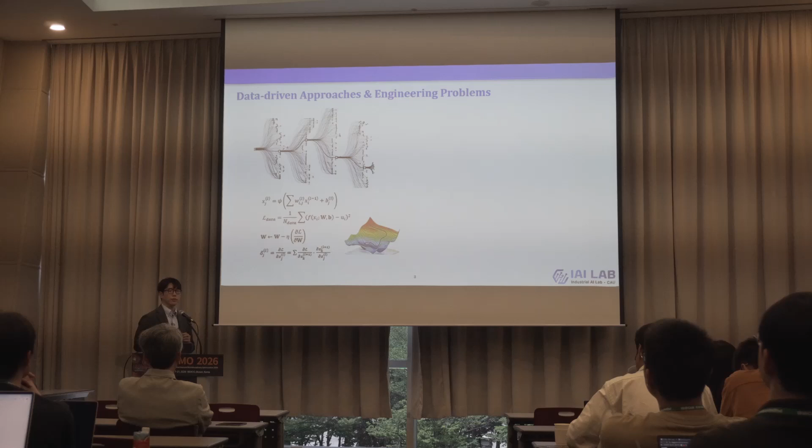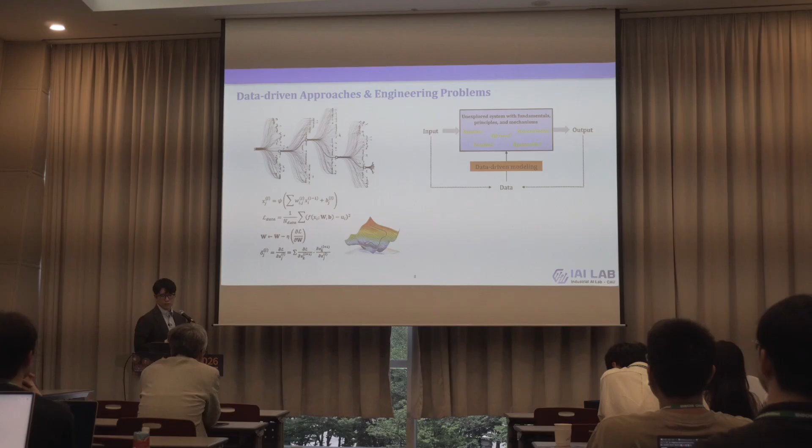All right. First, as you know, data-driven frameworks are trained on a bunch of data sets, and they might need to see thousands or millions of observations to make good predictions, right? So this raises a need to develop appropriate methods when specifically dealing with engineering systems with lots of physics and principles, from perspectives like generalizability, explainability and feasibility.

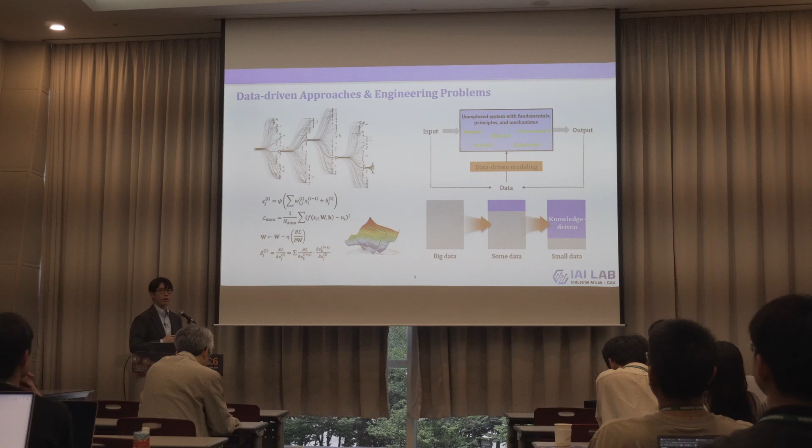So by integrating our domain knowledge with AI, we can move forward to knowledge-driven AI, not just for pattern recognition, but with improved capabilities for understanding underlying phenomena. Under this motivation, ever since my PhD study, I've defined a new field of study called engineered AI or domain-driven AI, which integrates our domain knowledge into data-driven frameworks.

More systematically, they can be integrated in 3 different ways. First is learning bias, which takes advantage of governing relations of the systems in training neural networks. We can also leverage architecture bias in designing new deep neural network architectures inspired by engineering principles. And representation bias underscores the importance of domain-specific data representation for effective information.

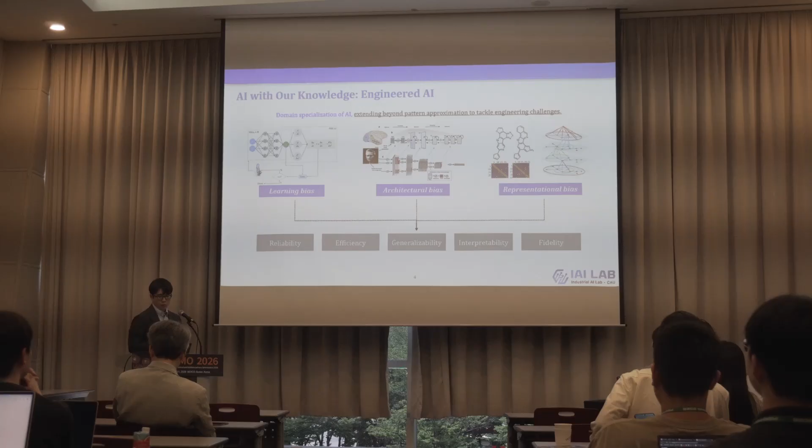So taken together, we can realize domain specialization of AI for tackling our engineering challenges, which means AI for engineering and at the same time, engineering for AI. There are many pillars to the engineering workflow, but let me take just a simple example.

Let's say I want to run my own bakery, and that makes me consider several things like conceptualization, right? Like how should I make bread and how many? And actually I should make some recipes and products, right? And I should do some baking and tasting to finalize the process.

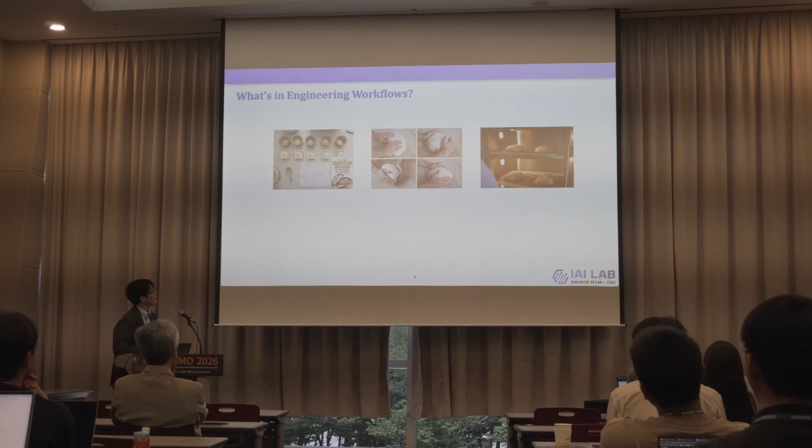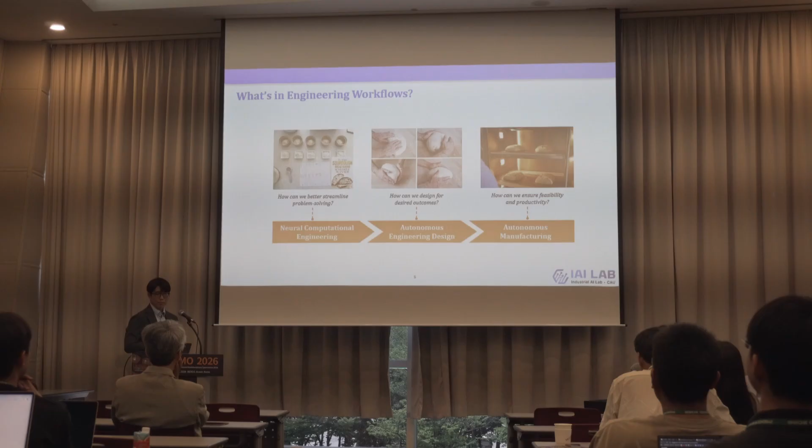In engineering sense, these several stages pose research questions like this. And our answers to the questions are associated with neural computation methods, autonomous engineering design, and autonomous manufacturing. Due to the time constraint, today's presentation will cover some of our works underlying the neural computational methods.

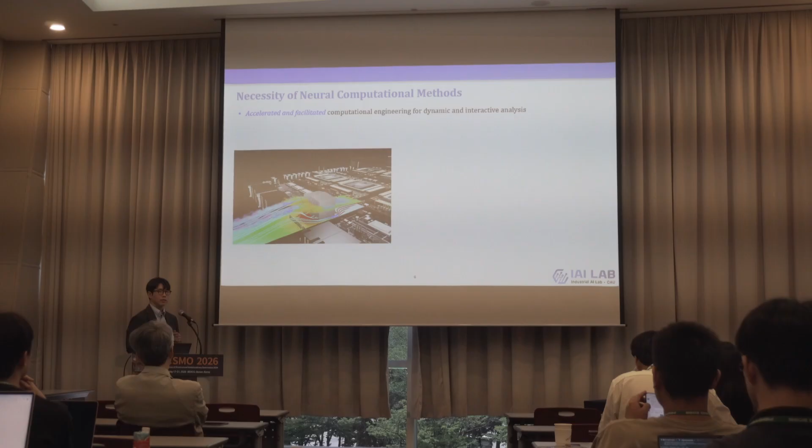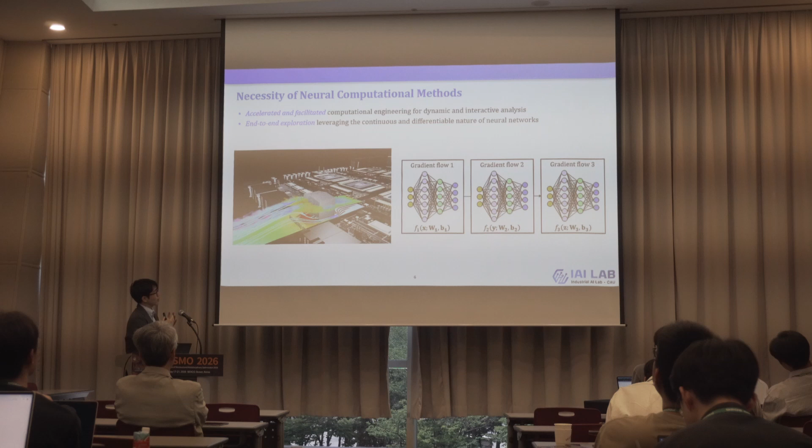Okay, so one of the main motivations of neural computation methods is to provide new opportunities in engineering analysis, because we are often constrained by excessive cost and tedious processes in engineering analysis. It raises questions of how we obtain a real-time and well-performing AI model. And the continuous nature of gradient-based neural networks can be utilized in an end-to-end manner for the entire problem-solving pipeline.

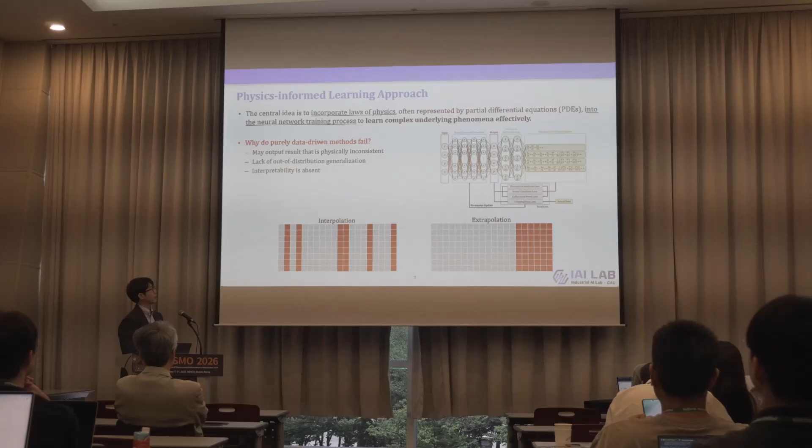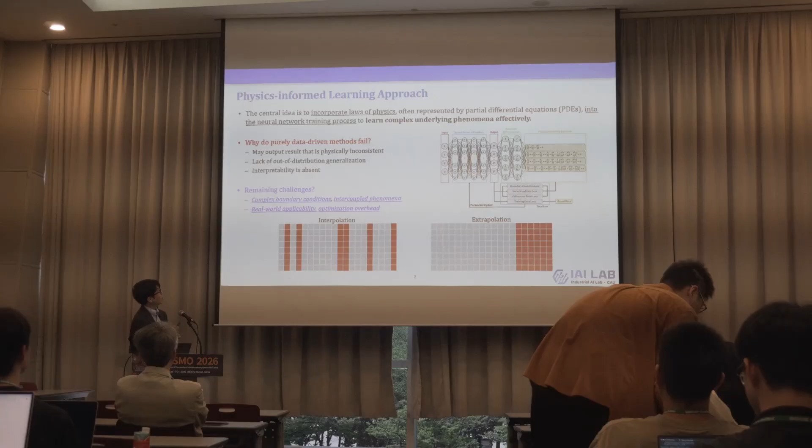Under this umbrella, physics-informed machine learning has been explored in various scientific and engineering applications. It has been designed to incorporate the governing equations of the systems, overcoming several limitations of purely data-driven methods. It can be very beneficial in many cases, but challenges remain, such as the lack of capabilities in complex boundary conditions and intercoupled phenomena, real-world applicability outside the simulation, as well as its optimization overhead. So I'm going to show you several directions for these.

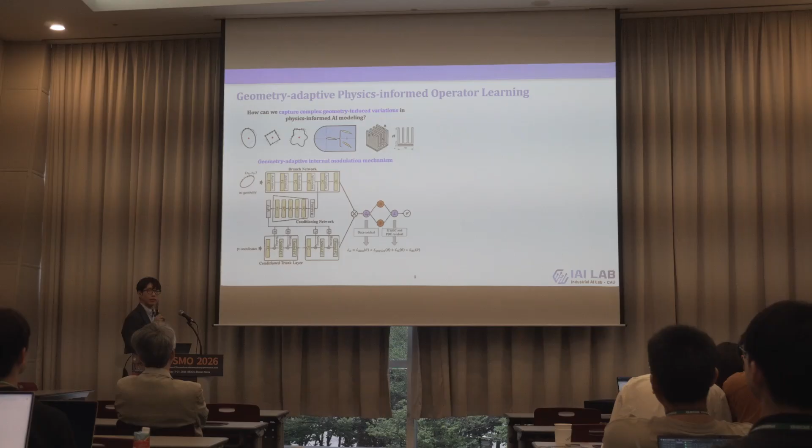One representative study falling into physics-informed machine learning is to learn complex geometry-induced variations, with expandability even in 3D space. We newly designed a geometry adaptive internal layer modulation mechanism to effectively capture feature information within the physics-informed learning scheme. As you can see, our proposed method can achieve robust and superior predictive performance compared to other physics-informed learning approaches. So we have more results.

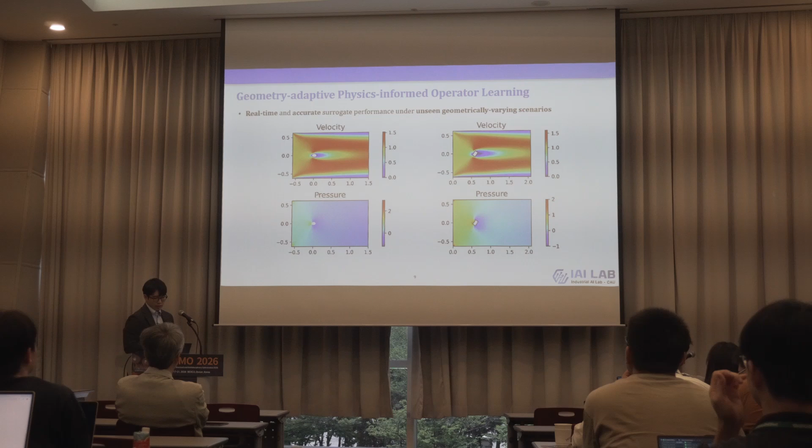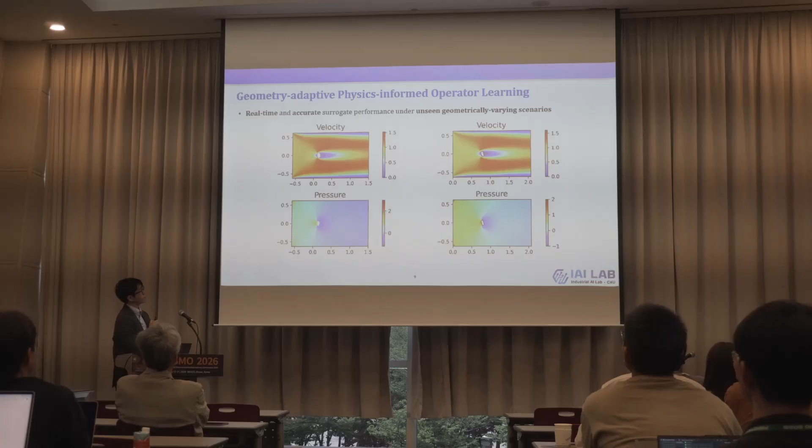In this case, the flow around the object. As you can see, it can approximate real-time and accurate behaviors according to different locations and different structural conditions. It is also capable of achieving real-time and accurate behavior of airfoils for variations in angle of attack. And for expandability to a 3D case, in this heat sink example, it can generalize successful approximation of temperature and velocity distributions.

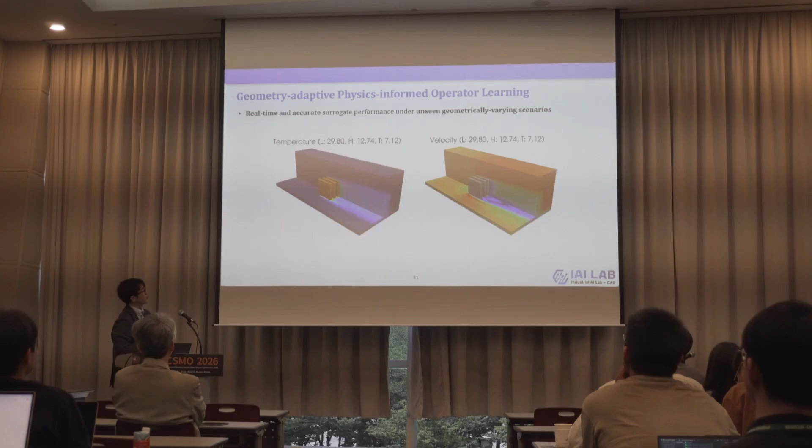So just imagine that if we construct these kinds of AI surrogates with real-time and well-performing performance, they can seamlessly integrate into various engineering tasks like design, manufacturing, monitoring, and so on.

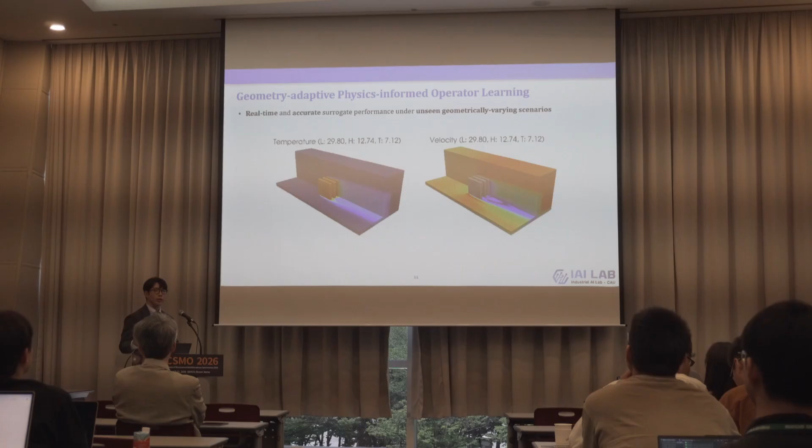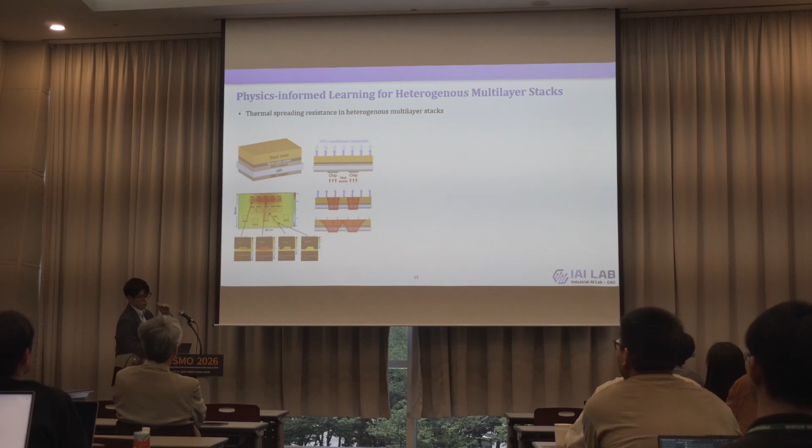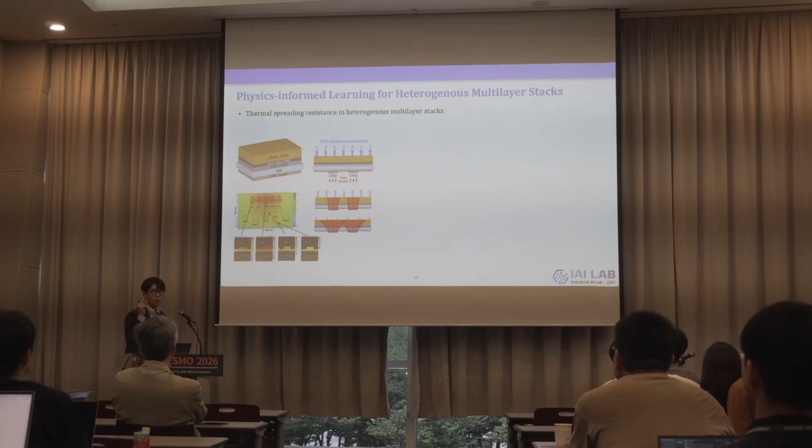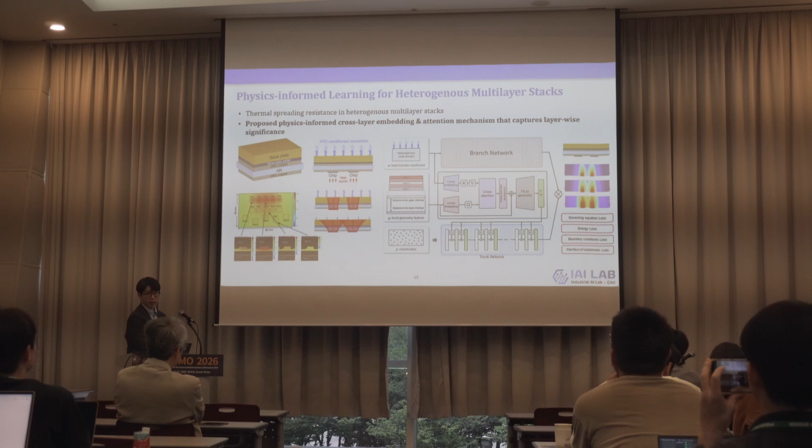All right. Another example: in this case, we focused on heat spreading behavior in a multi-layered structure. There are heat flux injection and convection at the top of the layer, with different kinds of sub-layers with varying material properties. That means to figure out this heterogeneous heat spreading resistance, the layer-wise or layer-induced causality should be informed in the deep learning model. So we newly designed a physics-informed AI model that can capture layer-wise significance by cross-layer embedding and an attention mechanism.

You can see we validated our method against concurrent approaches, and our method can show physically plausible results. But the thing is, as I mentioned earlier, one major challenge of physics-informed AI models is real-world applicability, right?

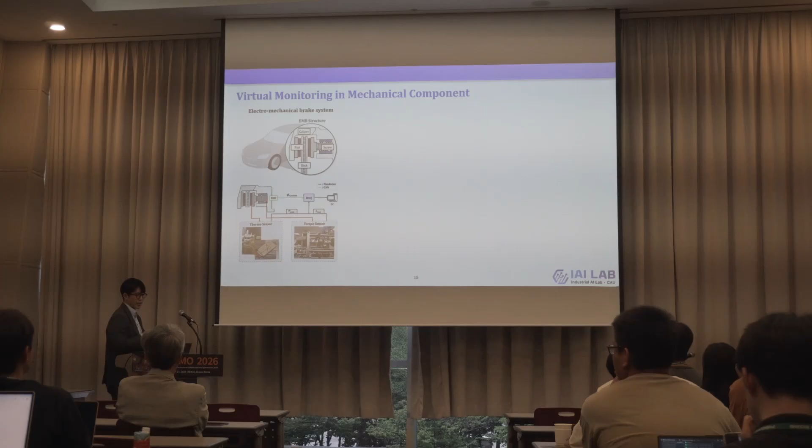So one example is the virtual monitoring of mechanical components. Understanding the state of a mechanical component or mechanical system is important, right? But it is not fully achievable because of measurement limitations. For example, a brake system of a vehicle is largely influenced by mechanical and thermal stress, right? But depending on different combinations or different kinds of operational conditions.

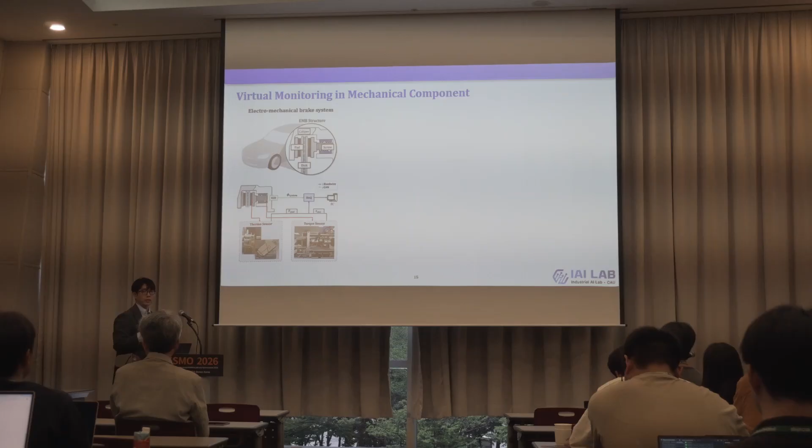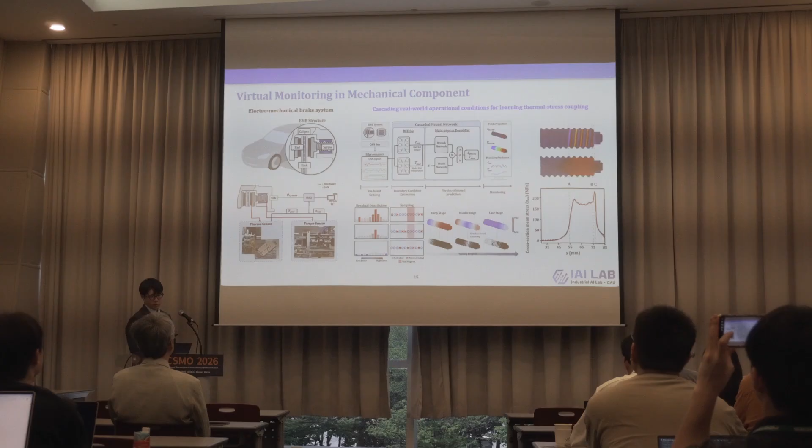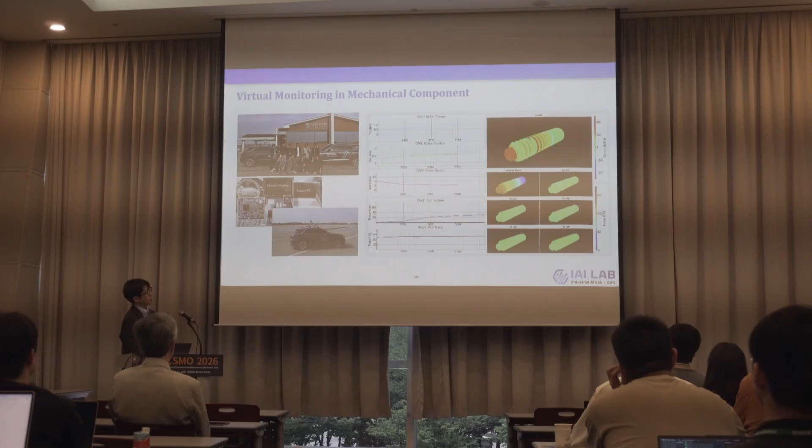So to reflect the actual operational conditions of the systems, we propose a cascaded neural network tailored for a three-dimensional mechanical component, with a real-world validation with a commercial vehicle here. And as you can see in this figure, we can virtually monitor these multi-coupled phenomena according to different actual operational conditions of the vehicle.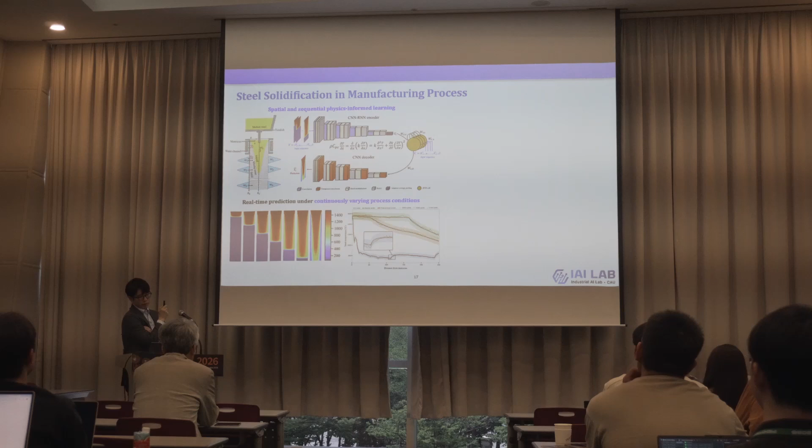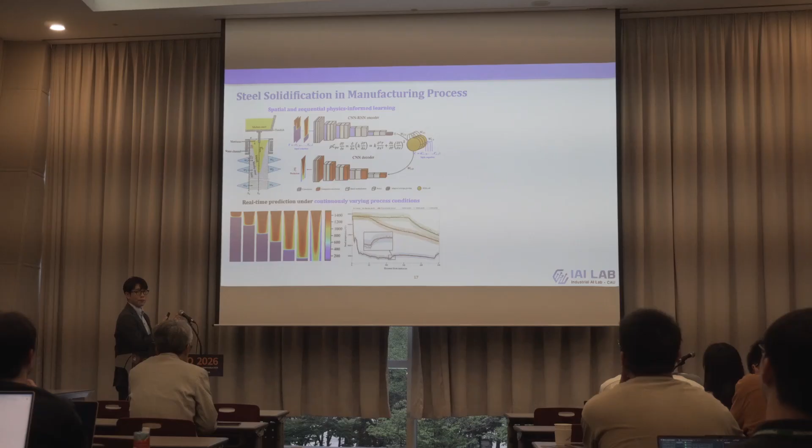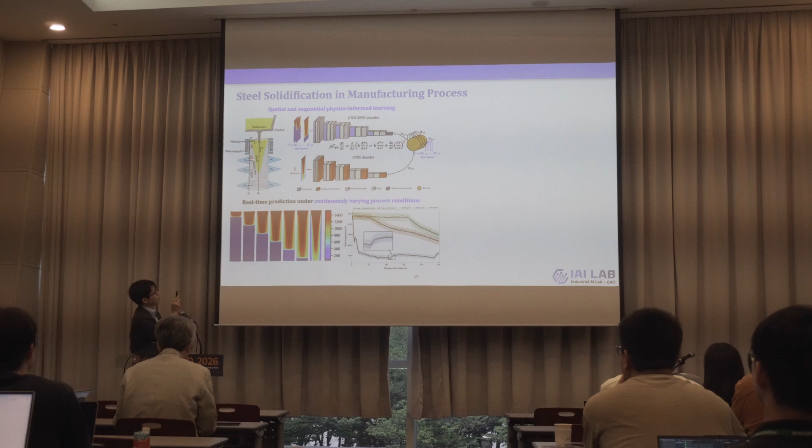And another example, this is a collaboration with POSCO, and we developed a domain-specialized AI model for the continuous casting process. The continuous casting process is the steel solidification process, and in this case, real-time characterization of solidifying behavior is ensured for productivity. So we developed our customized AI model for physically valid results while continuously varying process conditions like velocity, the type of materials, the amount of cooling water, and so on.

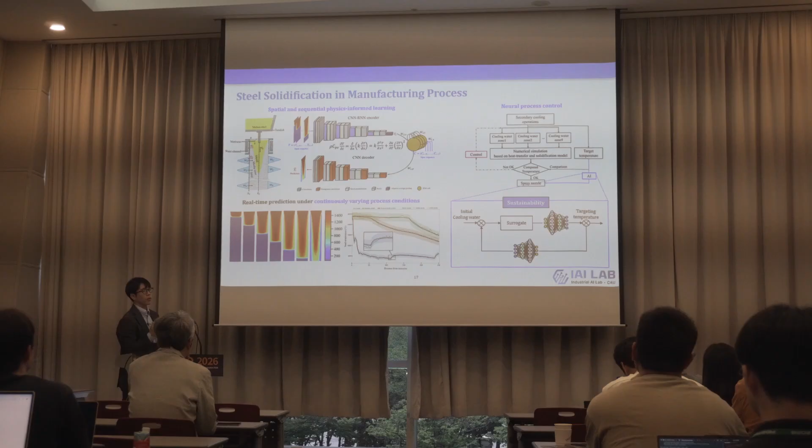And building on this framework, this proposed model can provide valuable information for process control, which increases manufacturability and sustainability for this continuous casting process.

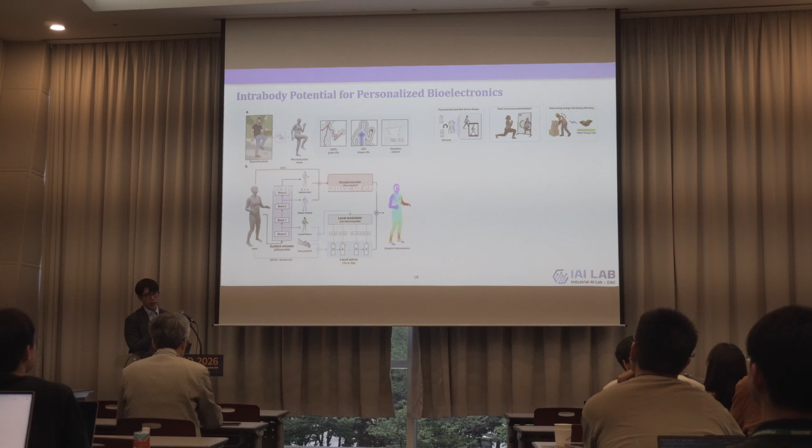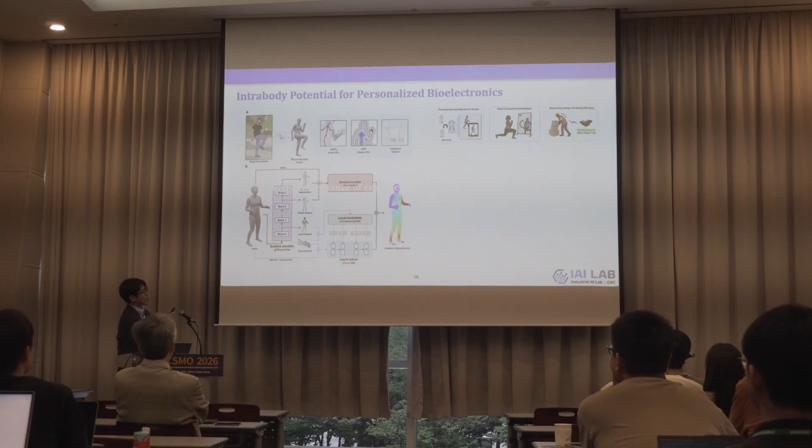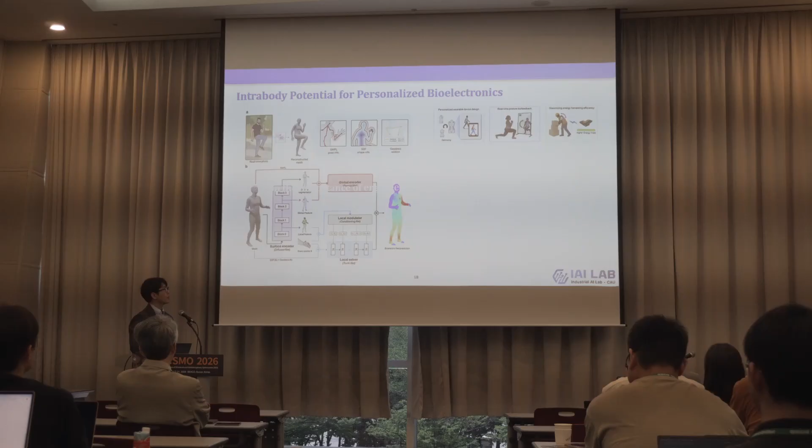And one more example is real-time personalization of intra-body potential. In this example, we proposed a specialized AI technology that can map the electrical potential field propagated within the human body from just a 2D image, which can be a basis for wearable device design, energy monitoring, and even human-mediated wireless communication. As you can see, depending on different postures and ground conditions, our model can predict the three-dimensional electrical potential distributions in a real-time manner.

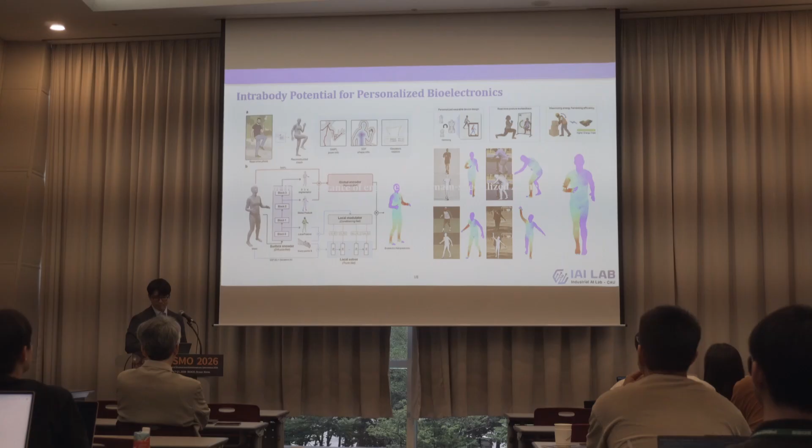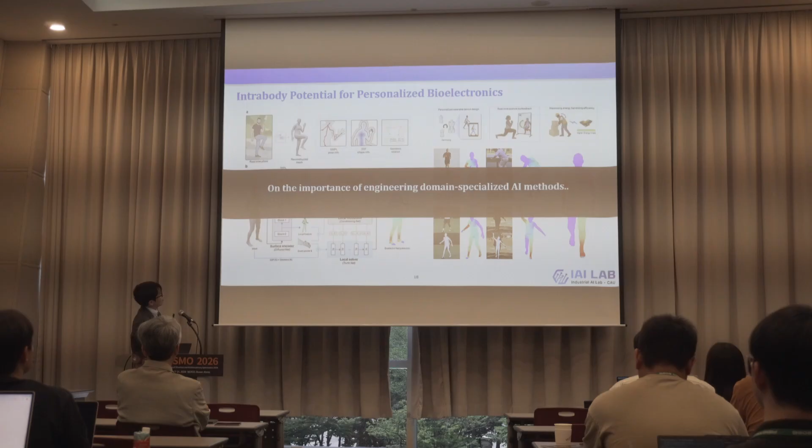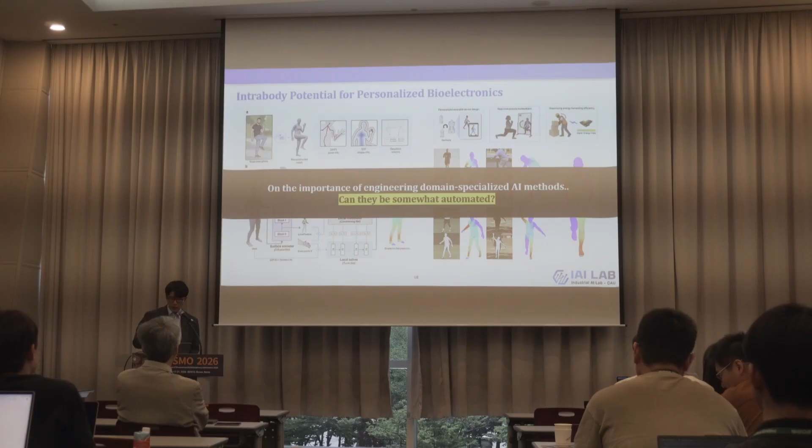So far, I've emphasized the importance of domain-specialized AI models, such as physics-informed neural networks, right? But at the same time, I strongly believe that it is important to make the process of developing such domain-specialized AI models more accessible. So this raises the question whether they can be somewhat automated. So we defined a novel approach of designing domain-specialized AI models, which aims at automated model design optimization.

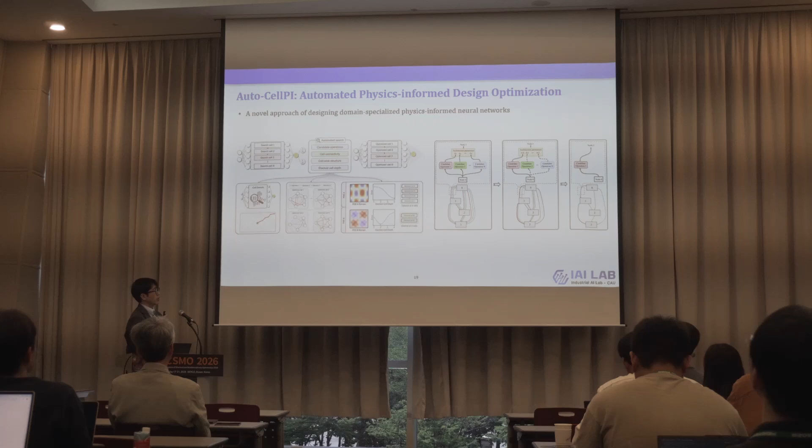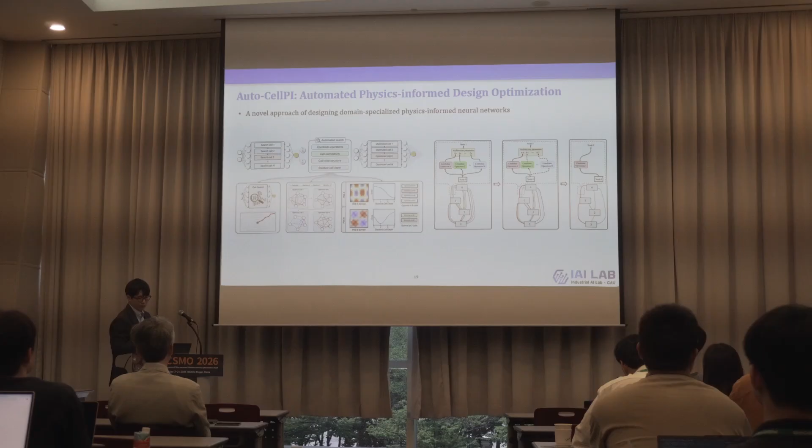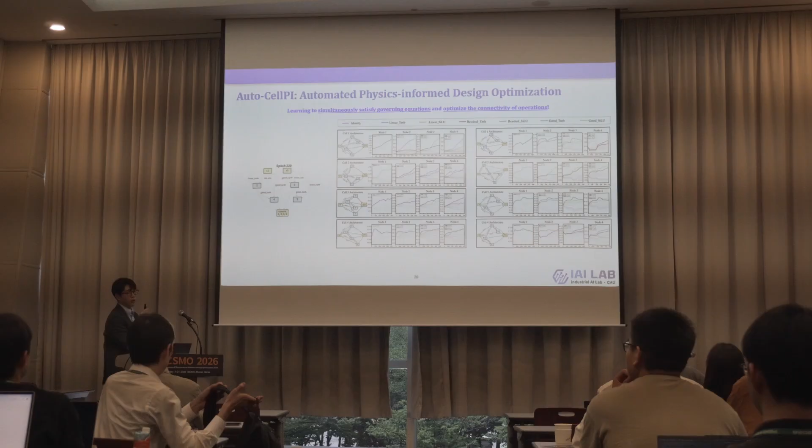As you can see, physics-informed neural networks are generally regularized by the governing equations, right? Partial differential equations. But at the same time, we propose how they are constrained by the combinations of the internal operations within the neural networks. As you can see in the results, our method enables the learning of governing equations and at the same time, the connectivity of operations. So you can see our proposed model keeps evolving to certain combinations of neural network architectures.

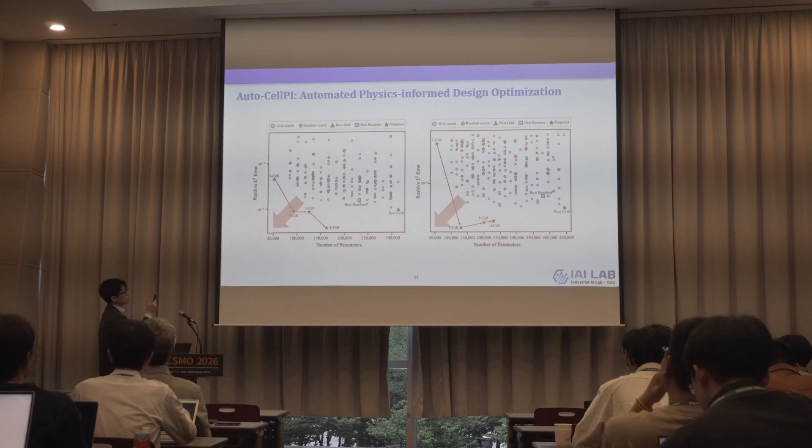And these are examples of our discovered deep neural networks in a physics-informed learning scheme. As you know, it's not like typical architectures widely utilized in physics-informed neural networks, right? But the important thing is that our discovered neural network achieves the lowest error with the smallest number of parameters. Given that performance and efficiency generally involve a trade-off, it's quite impressive that our proposed method achieves both.

So we came up with a very interesting idea: how about developing a large language model structuring someone's results, causes, and actions for a language-based reasoning and action framework. So we defined a novel concept of expert-embedded large language model. And we found that our proposed model can generate language-based reasoning and actions in optimizing neural networks with expert-mimetic interpretation and decisions.

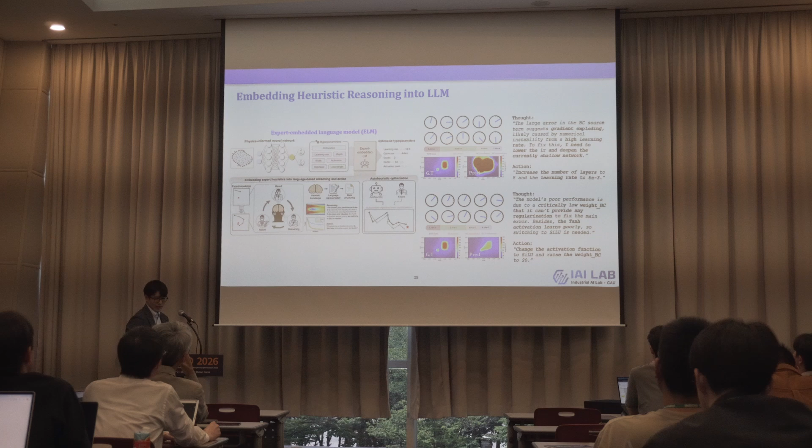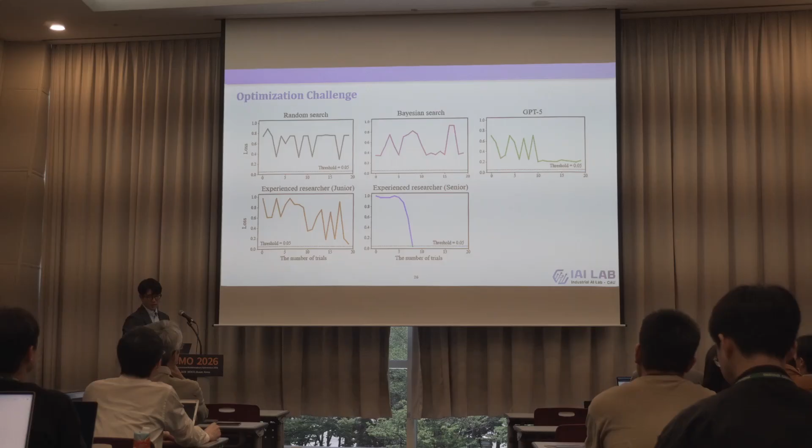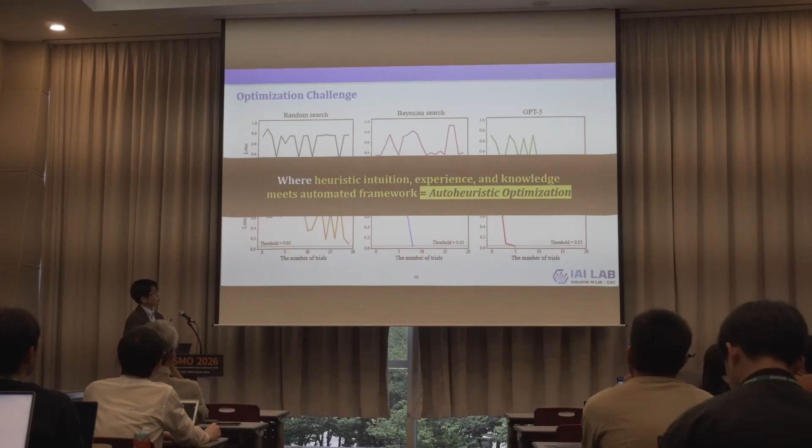And we also validated with actual humans, junior level and senior level students in our lab. It was quite impressive that the senior level students reached the desired performance in less than 10 tries. And how about our proposed model? It identified the optimal neural network architectures in 5 tries. So our proposed framework, where heuristic intuition, experience, and knowledge meet an automated framework, we define as autoheuristic optimization.

Not limited to the mentioned studies, we are developing a wide range of domain-specialized AI methods for mechanical understanding and knowledge integration. They can be applied to engineering design discovery, smart manufacturing, sensing intelligence for overcoming physical limitations, and also actionable intelligence for embedded systems.

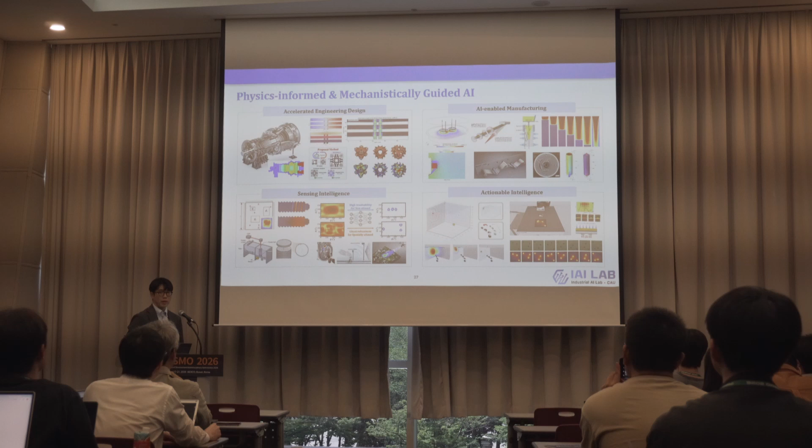And the last thing, going forward, there still remain a lot of challenges in real-world applications. You may refer to our recent review article that conveys several future directions and key challenges, in particular for manufacturing applications. All right, that's all for today's presentation, and I'm happy to take any questions.